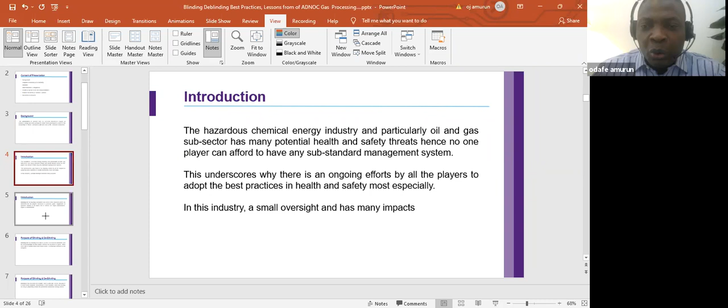Now, we're going to be talking about blinding and deblinding formalities. And these truly are some of the standard protocols that are observed by the players. Whenever a process plant or equipment or a system is required to be taken out for servicing or for major repair or modification, blinding and deblinding immediately comes to mind.

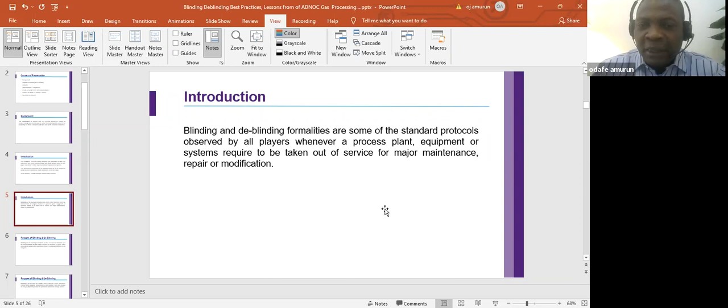Now, let's look at some of the purposes for doing this blinding and deblinding. Blinding and deblinding is a part of a positive mechanical isolation. As a matter of fact, it is the most important part of the positive mechanical isolations that are executed in the hazardous chemical energy industries, especially the oil and gas subsector.

Now, without the insertion of blinds or spades on the line, even with a double block and bleed valve, mechanical isolation is not complete. It's not deemed to be complete, except you insert blinds into the line, or you use blinds to close that valve that you have removed.

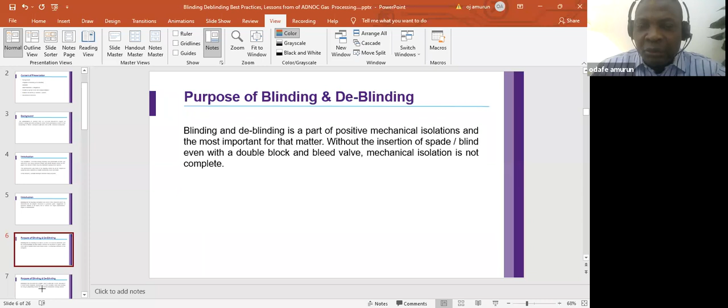Now, another reason why we do blinding in the industry is to close up a loop when we have physically isolated the energy by removing a valve. We use it to close up that loop. If you remove a valve, you can't leave it open the way it is. You have to close it up with a blind. It's a mandatory requirement.

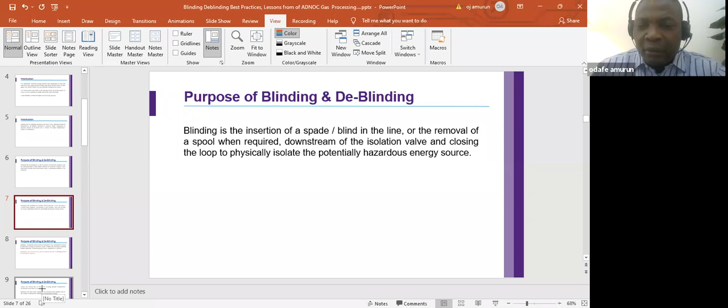Blinding and deblinding also help to protect employees from unexpected release of hazardous energy in situations where workers are expected or are

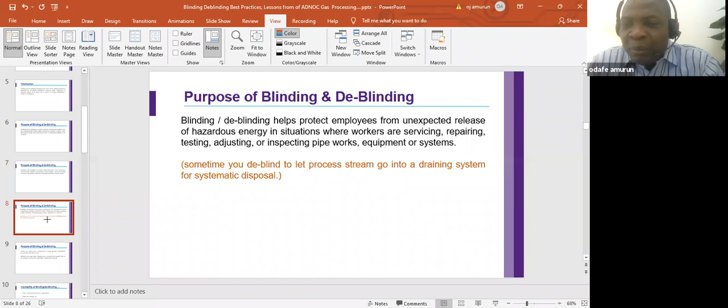Odafe, we lost your presentation. Can you display the presentation?

and people we need to enter. Sometimes we do deblind to let process streams go into a draining system for systematic disposal. Sometimes we can just remove that blind from an equipment, from a vessel or from a tank, when you want to drain off and dispose that process stream systematically.

Now, another reason why we also do blinding, and of course the deblinding on the other hand, is to ensure that the correct line or equipment is opened.

Mr. Odafe, please share your screen. Can you see my screen now? No, just wait for a while. Yeah, it's coming now.

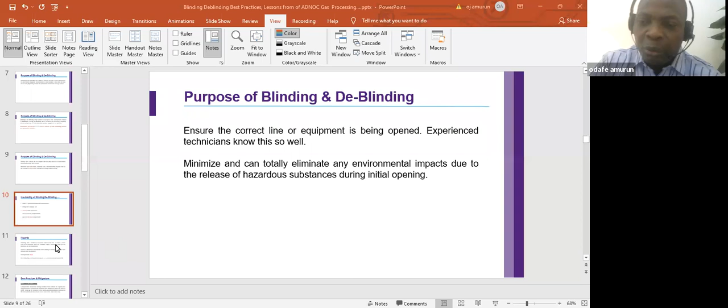Now, I'm going to talk a little bit about preparation for blinding. Now, if there's going to be any intervention, maintenance, or modification, whatever work inside an equipment, a vessel, or a tank, before ever that is done, you do a blinding. And before you do a blinding, there are some preparation and planning works that you need to carry out. One of them is that you need to complete the hazardous energy isolation form. Some companies call it the blinding list.

On this form, you have to specify the equipment or the line by their numbers that you want to work on, you want to blind. You also have to state the activity that is driving this blinding. Maybe it's just for inspection or for cleaning or for modification. That needs to come out very clearly on the form.

Then you need to obtain the piping and instrumentation drawing for that equipment, for that line. And then on that piping and instrumentation drawing, P&ID, you need to mark up the locations of the flanges, the locations of the valve, locations on the line that you are going to insert the blinds. You need to mark them out, and then attach it to your blinding list or your hazardous energy isolation forms.

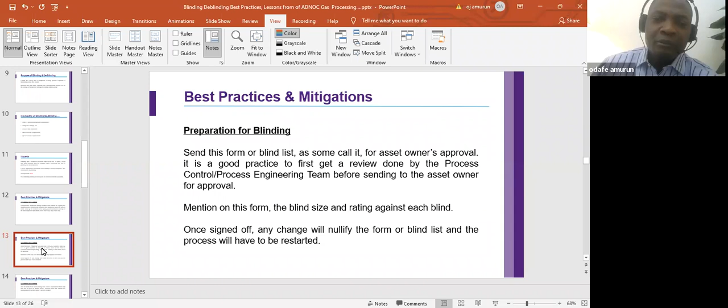Okay, so this is part of the preparation to actually insert the blind. Okay, now you have the permission to insert the blind. Then another action that you must take as part of the preparation is that you have to sort the blinds to be used, and then you have to put tags on them. Some organizations have tags that can be used to identify blinds. They have tags that can be used to serialize them, to indicate the line.

Odafe, your screen has again disappeared. Can you please check? Okay, so can we move on now? Can we move on now, Said? Yeah, go ahead, go ahead. There was a break for a while, but go ahead, please. Yeah, each time a person joins, there's that disruption in the flow. Okay, so we're gonna move on now.

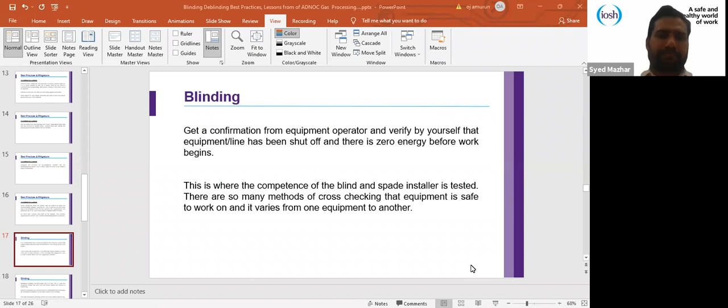So you need to verify that the equipment has been shut off and there is zero energy before work begins. And this is where the competence of the blind or the spade installer is tested. There are so many ways by which we check whether an equipment is shut off or not, so that you don't go on and open an equipment that is still on stream. So before you insert the blind, you need to check for zero energy.

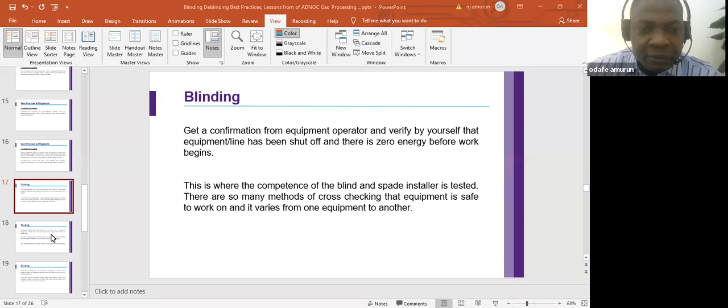Then blinding and de-blinding usually should be done one at a time. Once you insert one blind, you must complete the blind tag for it. And then you must fix the blind tag on that blind that you have inserted. I did not mention that before you even insert a blind, at the point where you're going to insert that blind, there's something we call the blind point tag.

You are going to first and foremost install your blind point tags at all the locations where blinds are going to be inserted. Then eventually when you insert those blinds, you will remove the blind point tags, and then you're going to replace them with what we call the blinded or the spaded tags to show that this equipment has now been blinded. It is not just planned to be blinded. It is now truly and completely blinded.

And then all of the information on the blind point tag, you will transfer to the blinded tag or the spaded tag. In terms of number, name of the person who did the installation, the equipment name, the equipment number or the line number, the date on which the blind was inserted, all of that you will put on the blinded tag for that location. Now, the information on the blind point tag and the blinded or spaded tag are essentially the same. But companies used to differentiate one from the other by the color in which they give them.

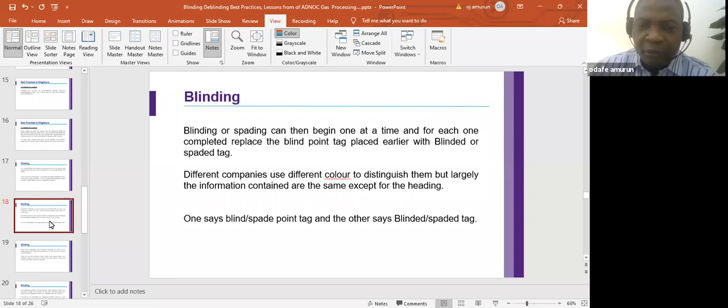All right. Now, once these blinds have been inserted and the blinded tags have been completed and fixed on the blind where you have inserted it, the technician installing the blind or the spade notifies the equipment operator, and in some cases the process control engineer, that, okay, we've finished blinding the whole of this line. This work is completed.

We have signed off the blinded tags. We've signed off the blind list, and we signed off on the hazardous energy isolation form. He has to notify the equipment operator and the process control engineer. And then they too, the equipment operator and the process control engineer, we go now to see the equipment and then check again whether truly and correctly the blinds have been inserted in those positions that were identified earlier for the insertion of the blind.

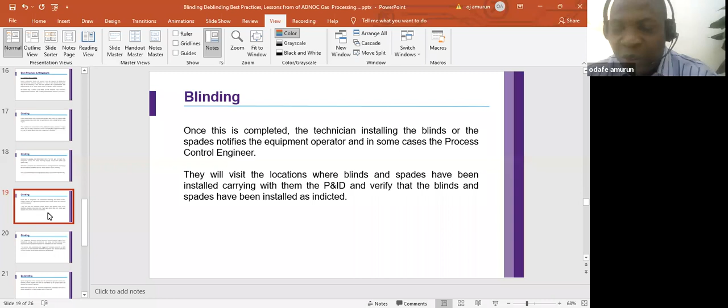And if they are satisfied with the work that was done by the technician who did the insertion of the blind, then they also will sign off on the blind list or the isolation form to show that they have checked, and then it's fine, it's okay. Now, the equipment operator, the process control engineer, the technician who inserted the blind, they've all signed off on the blind list or on the hazardous energy isolation form, that the job is completed, the equipment is ready to go out for servicing or whatever.

Now, it is very important that the person who supervises the equipment operator, sometimes in some companies they call them shift supervisors, in some companies they call them shift controllers. Different companies use different job titles for this position, but this person who supervises the equipment operator must finally authorize the blinding. He must get a copy of what has been done, and then he must authorize that equipment to be blinded, for them to insert a blind or a spade into a process equipment or a process line. That is a very important requirement.

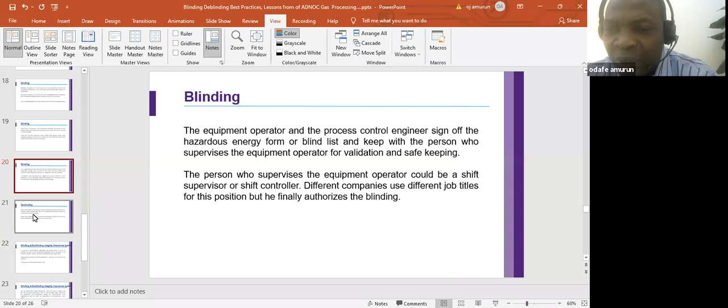Odafe, your voice is breaking and the slides are not changing. Can you please recheck? Ladies and gentlemen, sorry for the inconveniences occurring again and again. We're trying to fix the issue and Odafe will be back in a second. We're communicating with him, so please stay with us. Thank you. All right. Syed, can you see me now? Yes, please fix it because people are concentrating a lot on the subject and it's a very essential subject. So try to figure out this internet issue you might have. I think we have only a few slides remaining. Yeah, the point is that when somebody joins in, the old system, I see on my screen, somebody joins and then again, it just goes off and on. Anyhow, we have a few slides left. Let me quickly move on with it.

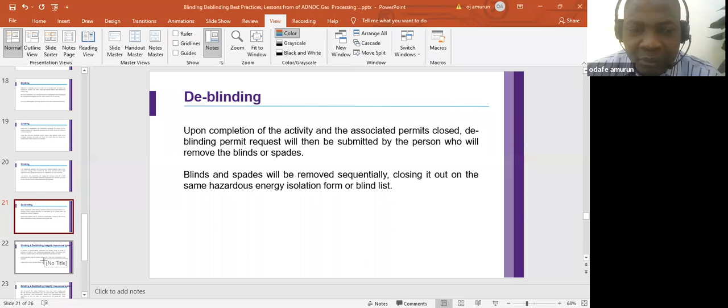Now, this is very important. Most companies do not have this level of control. There's another level of control we call independent verification. This is done by another body or another team of persons that were not part of the equipment operating team. They are not part of the process control team. They are not even part of the blind installation and removal team.

This is another layer of control through the cold eye review, or the lens of an outsider. Me as a health and safety practitioner, and most of us on this call, may have been part of this independent verification team. Before they ever break into any vessel, when they say they have finished the blind insertion and want to break into that vessel or equipment, this independent verification body will go and do an audit. We call it the blinding and deblinding integrity assurance audit. This is a very key requirement these days in the oil and gas subsector.

Because I have seen situations where this particular audit was able to avert what would have been a catastrophic loss of product. So this is very important. Independent verification by a body that is not part of the blinding and deblinding, not part of the process engineering. Usually they drag health and safety professionals into this team to do what we call a cold eye review of what the people in maintenance, process control, or shutdown works have done.

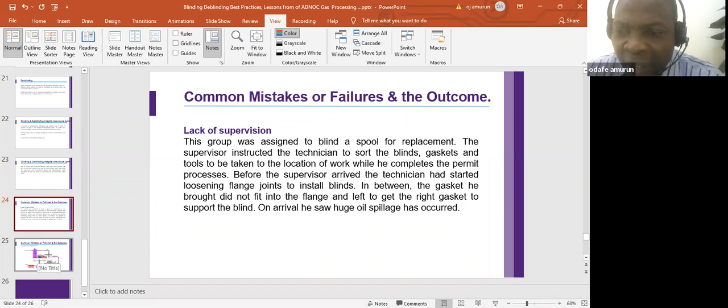In the course of marking it up on the P&ID and tagging it off for blind insertion, it was line B that was marked on the P&ID for replacement. And all of the flanges on that line were also tagged off for insertion of blind. But while the independent blind integrity assurance audit team were going around, looking at all the documentation and checking what had been tagged for blind insertion, they discovered that it was actually line B instead of line A that had been tagged off and even marked up on the P&ID for sectional replacement.

Now, without this blinding and de-blinding integrity assurance verification, this maintenance team would have ended up cutting off, severing line B instead of line A, which had the severe corrosion and was actually planned for replacement.